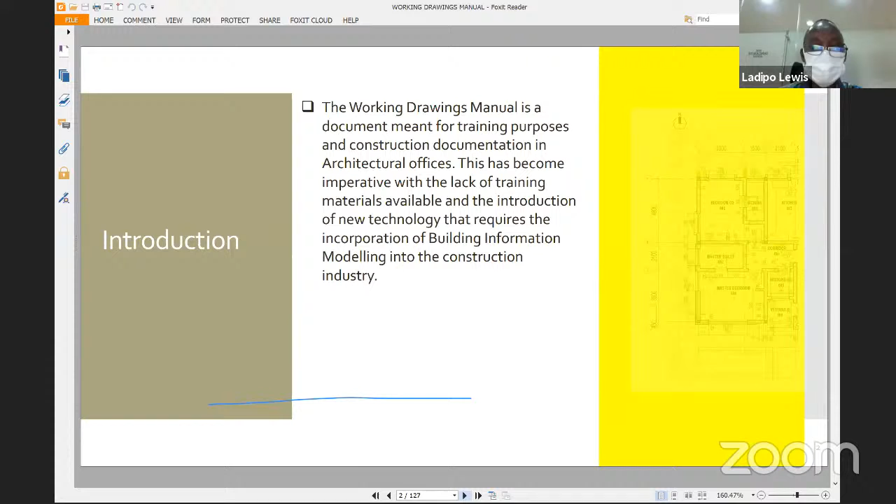Now let me go to the summary of what this manual is going to contain at the end of the day. You can see we've done the introduction, the types of drawings, schematic drawings, design drawings, detailed drawings, working drawings. I'll briefly go through that.

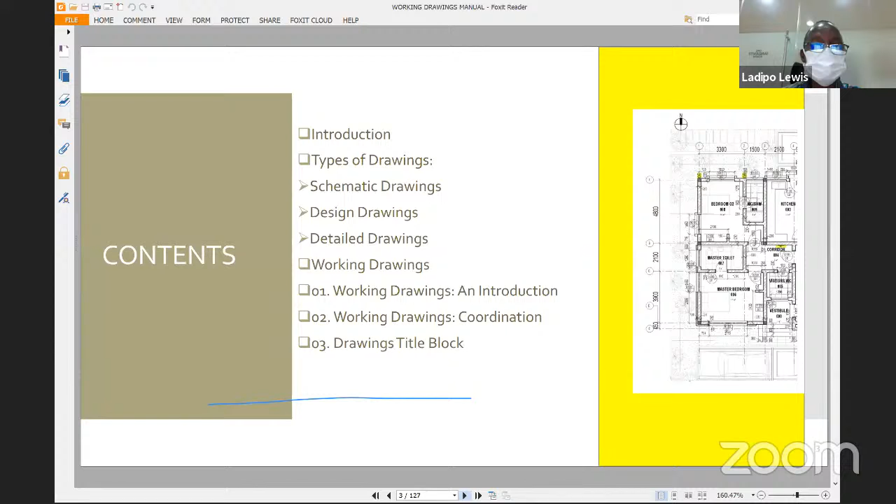We've gone through this before, but I'll briefly go into that. Then the coordination, requirement for coordination. Then we take the meat of the drawings: the title block, the schedule of drawings, then the key drawings, site plans, floor plan, reflected ceiling plan, roof plan, sections, elevations, and interior elevations.

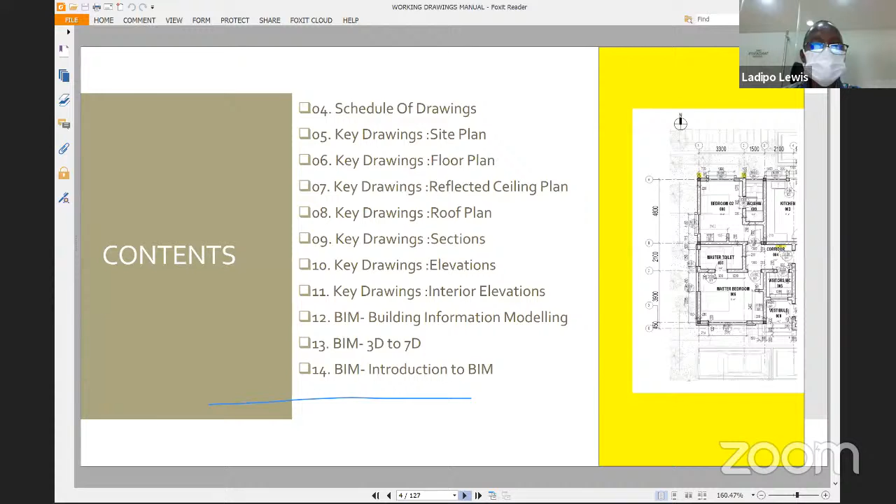Then we also want to go into BIM, building information model. What is it? Then evaluate BIM 3D to 7D. Then really the introduction to BIM itself, BIM computer modeling, BIM computer visualization, BIM external and internal collaboration, BIM construction coordination, BIM for calculation, BIM for sustainable design, BIM for parametric object technology, BIM for computer manufacturing, BIM for documentation. Then we'll go into a summary and our references.

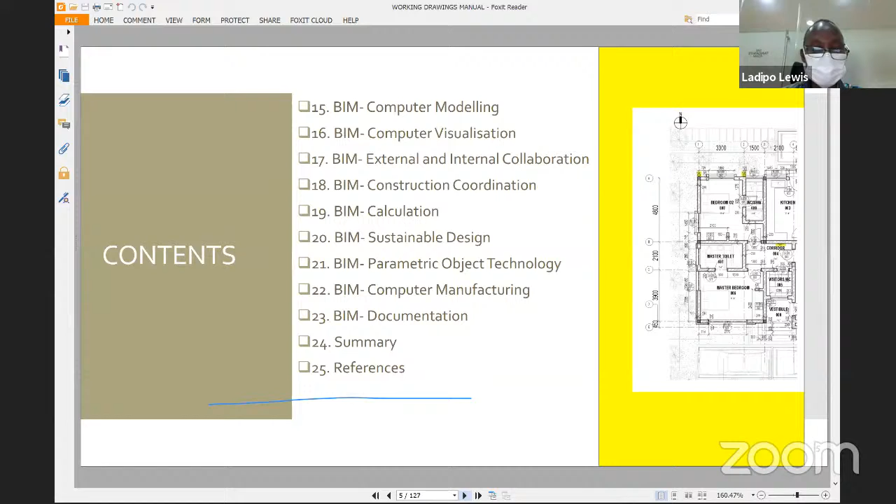So it's going to be quite an extensive document. It's a working document.

I'll briefly go through what we've covered in the last presentation. Drawings can be classified in the design development stage into three categories. Some would say design and detailed design can be merged into one, while others split it because there could be some variations.

So you have your schematic design, which could also have a subset called concept design, where you don't really have a building, but you have abstract sketches of what you want to do. Even within schematic design, you could have a concept subset, and then you have the design drawings, where you have an idea of what you want to do.

At that stage, you have overall dimensions and overall layout. You have those basic inputs, but you've not really started collaborating. So when you go to detailed design, you are collaborating with the other consultants—mechanical, electrical, plumbing, AC—bringing them in for a detailed design.

By the time you're going to your working drawings, as you'd say, you've brought in workshop drawings, details of every part of the building, and you're on site putting things together.

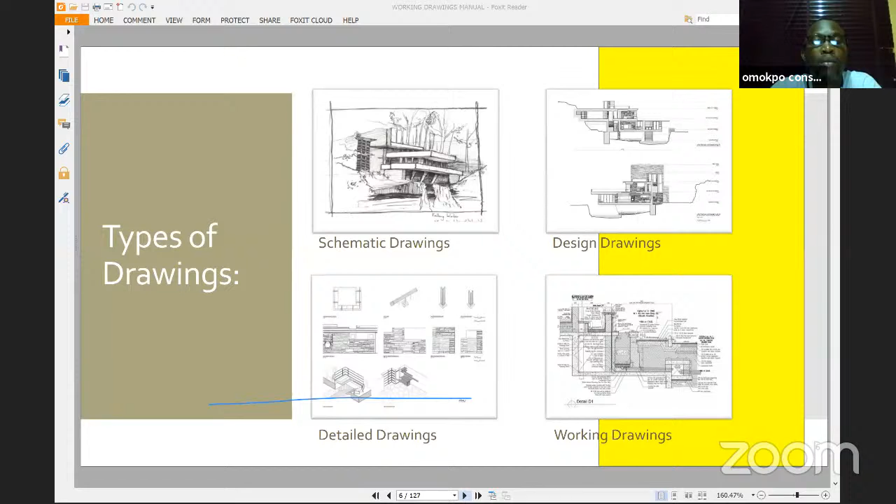And as you know, on site, you also will continue updating your drawings as new things come up, as issues on the construction site are dealt with, until you get to the end and you also have an as-built drawing. I can tell you there is hardly any project where drawings are not updated at the end of construction as as-built drawings.

Now, so you would have this presentation, as you have seen. I'm showing schematic drawings from bubble diagrams to some perspectives and some color drawings. So you can call these schematic drawings.

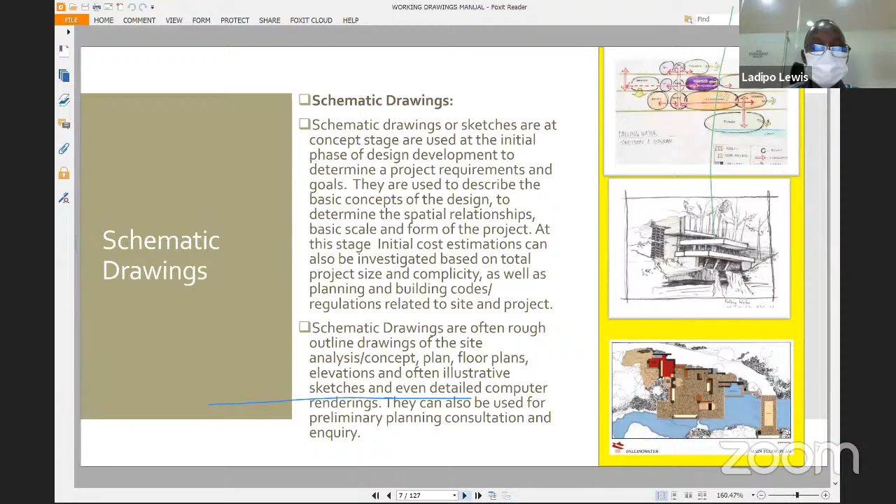Design drawings show a bit of outline and detail, and the architect has already brought out his proposal, which at this stage can even be sent for planning approval, or at least for preliminary assessment. So you have that as a design drawing.

You can get full client approval and say, look, at this stage we're moving into the real details of putting other things together. You have your structural members or the concept of the structural components at this stage.

Now, at this stage, if you decide to change your drawings, it means you are starting afresh all over again. So you need to be careful, because if you've gone through the proper process, you've actually done quite a lot of work.

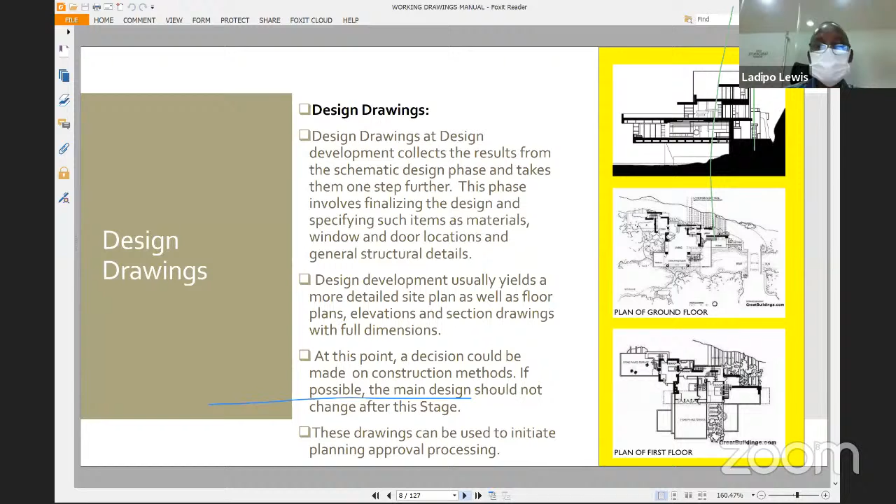Now, when you get to detailed drawings, you're already working with other consultants. A lot of drawings are coming in—some subcontractors like AC and acoustics will be sending you drawings and so on. You'll also be looking at a lot of specifications that will be finalized.

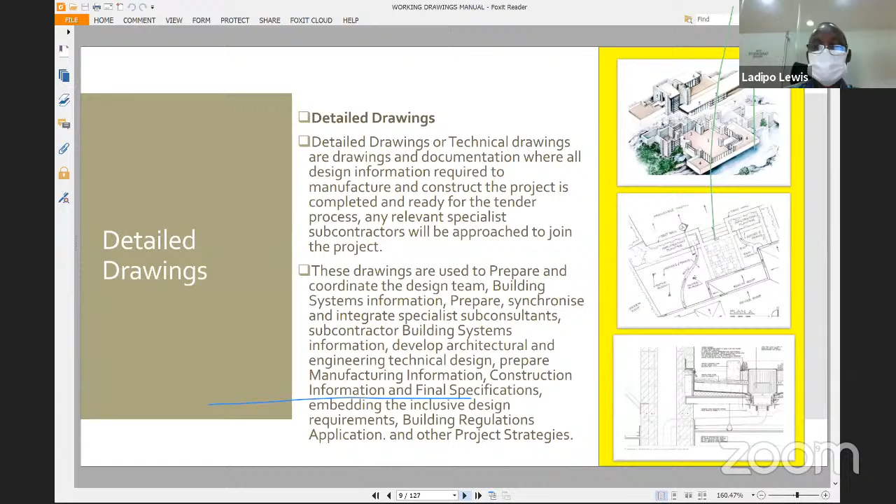And by the time you go into your working drawings, you are ready to build. So there are a lot of details there. You'll be thinking of waterproofing details, finishing details, specialist works that will be coming into the project. These are the drawings you use to build.

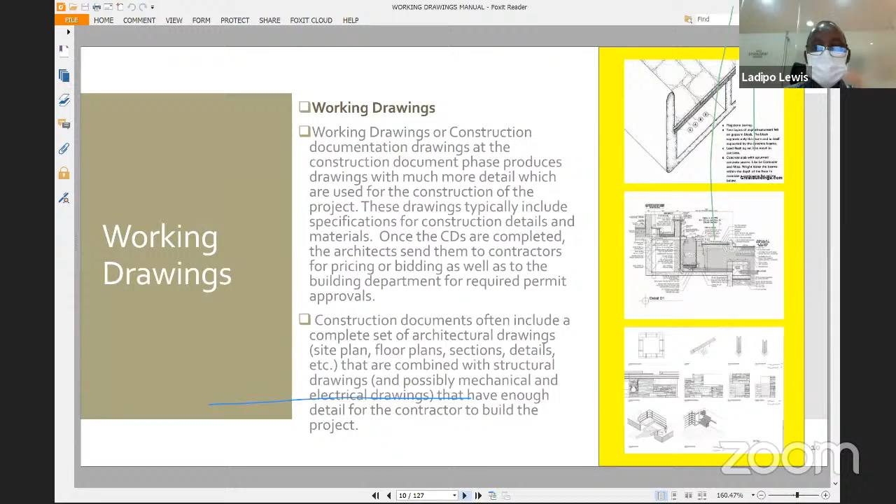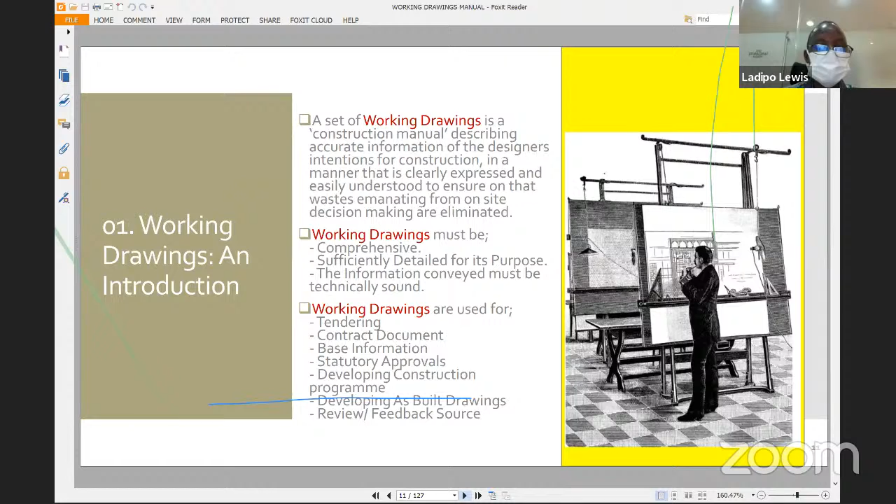So, as you can see, the set of working drawings is a construction manual, and it's supposed to be accurate. You're going to use them for tendering, contract documents, base information for statutory approvals, developing a construction program, and developing as-built drawings, as a review and feedback source for whatever you're doing. It must be comprehensive, sufficiently detailed, and technically sound.

Now, one part of working drawings is coordination. You need to understand that you cannot have a set of working drawings without a serious amount of coordination between what you started off in the schematic design, what you're putting together with physical planning requirements, and what you're putting together with mechanical, electrical, plumbing, and all other aspects. You need to coordinate at all levels.

You need to avoid discrepancies in what you will put on your notes or your title blocks.

The coordination aspect is key. One of the things we notice is that for coordination, you remember the days when you were drawing manually with tracing paper. You had to put the structural engineer's drawings on top of your architectural working drawings, and of course they must be on the same scale, so you could overlay the structural members with your architecture. You see that columns are in the right position, concrete shear walls are in the right position, and they don't obstruct the architectural design.

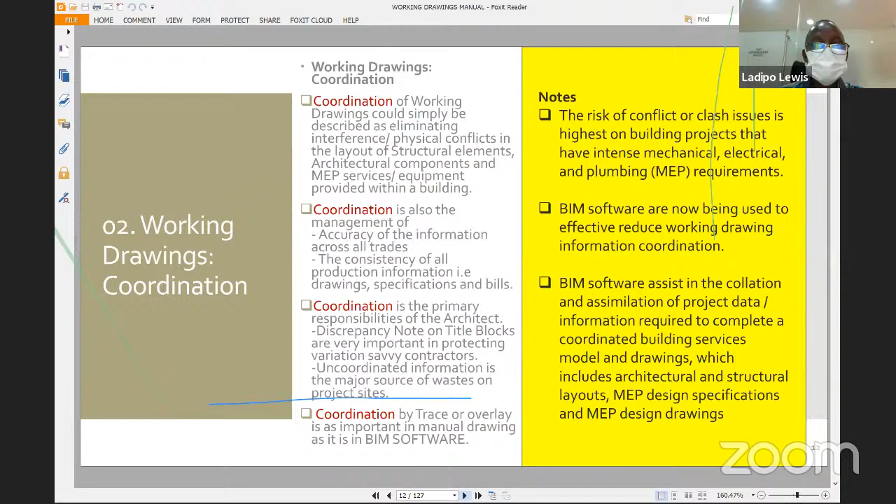This also occurs even in computer-aided design softwares. ArchiCAD has the trace tool that you can place one sheet on top of another and overlay it. Even if it's a 2D drawing, you can still overlay it. Revit too has that capacity as well. So coordination becomes a key thing. You need to have a checklist of whatever you're coordinating together in your working drawings. It's very, very important. Those mistakes cost a huge amount of money on construction sites.

So we'll go to the first part, which I'm going to run through since we've been doing. That's your drawing title block. Please make sure that they are accurately laid out. Make sure that you check them. You should have the architect's name, address, and details. You must have the client's name on the drawing.

You should also have the project name and address. This should be part of the details in your presentation of the title block. It's key. It's a requirement for planning approval from the stage of your design drawings.

You should have your drawing title. We've had a series of drawings coming up by candidates or architects who have a project for a commercial building, and then you're seeing the title reading residential. So this needs to be carefully checked at all stages of your production of working drawings.

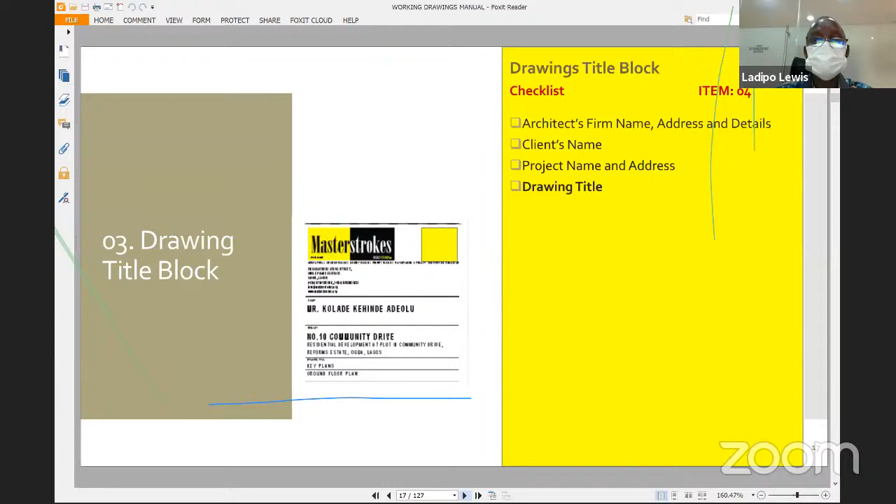Project number - you should have a project number so you can track your projects. The project status: is it a schematic drawing? Is it a construction drawing? Is it as built? Is it a measured drawing? So you should know the status, or is it for planning approval? You should know the status of those drawings.

Then the project team details - who designed it, who checked it, and if you want, you might have a final reviewer, so you can track who did what.

You have the scale of the drawing. It's important that you have a scale so that people can reference your drawing and relate to it. It's important, even though it's recommended that contractors don't measure, but at times you need to be able to understand how things fit on the drawing.

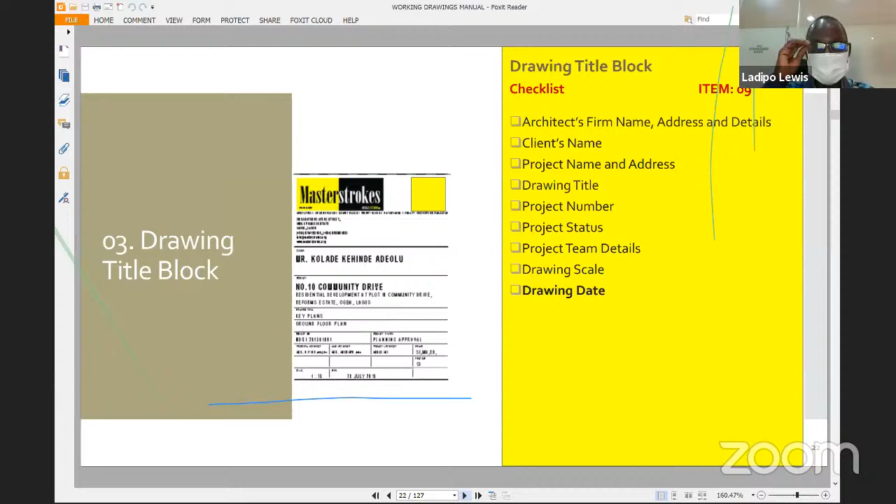You have a drawing date, very, very important. You should know where reviews were made, which drawing came before another, so you don't issue out an old drawing and then there's a bit of a calamity on site, discovering that a lot of work was done, but the wrong drawing was issued. Then the sheet size, so that those printing your drawings will be able to relate to it.

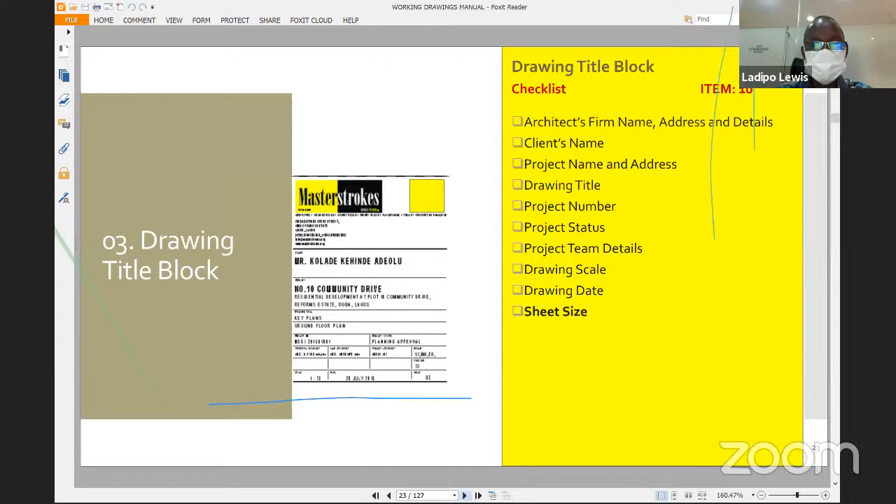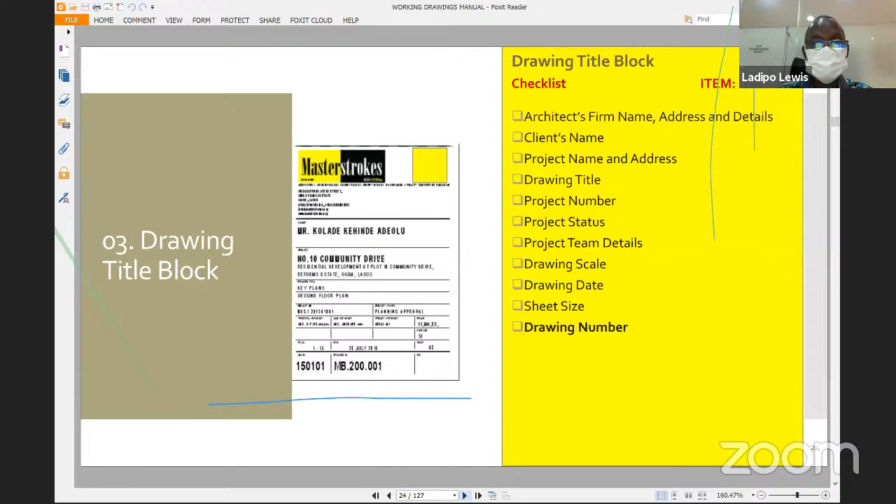Now the drawing number - if you have 100 sheets, 200 sheets, and there was an error, somebody spilled them on the floor, how do I arrange them? Drawing numbers are quite important on each sheet, so you can put them back together. Then a revision bar - this will address the revisions that you've made, one after the other.

Drawing notes, which you can update on all the work you've done on the drawings. Here you can put quite a lot of details to address anything that you want the person going through your drawings to note.

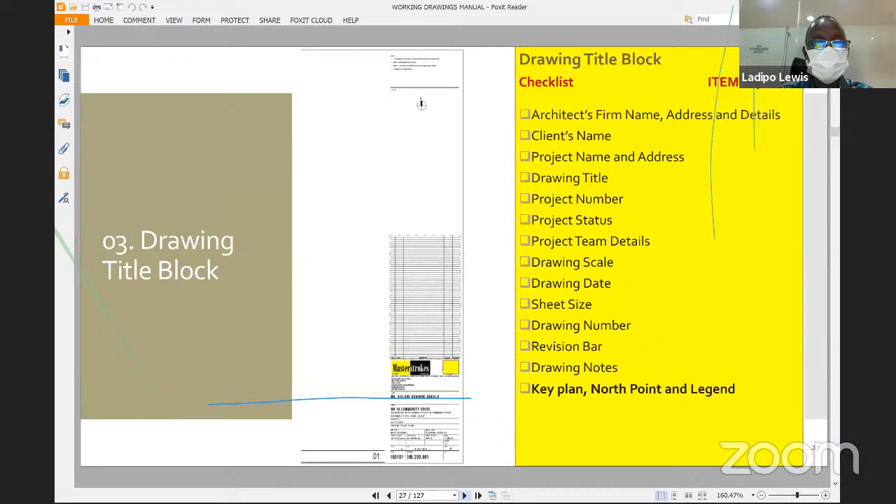And then your key plan and the legend. If you have a lot of details, the legend is the best way to note them down on your drawings. Now you have the schedule of drawings, which is basically a list of all your drawings.

So you have your location and key drawings. The more detailed a project becomes, the more drawings you might need to have on your schedule. And you can create subsets and subsets of these drawings as you go along.

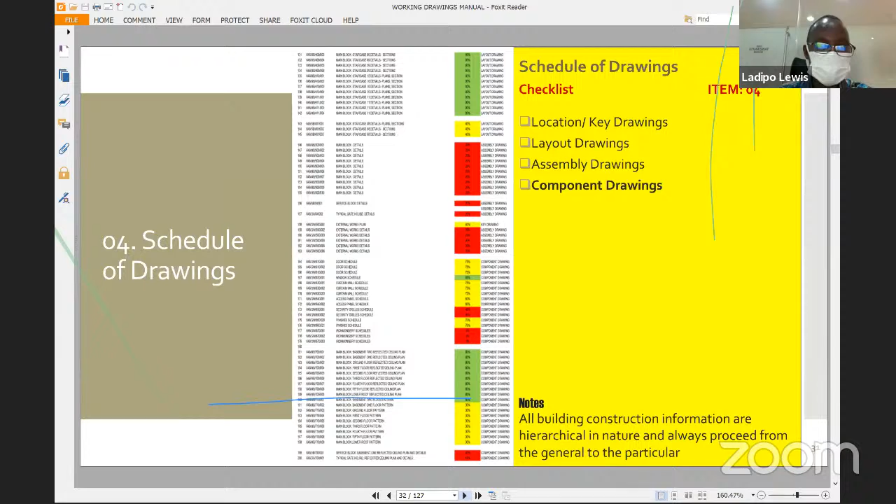You have your layout drawings, which we've gone through already - your plans, elevations, and all those drawings come in. And then assembly drawings, details that will relate to different parts of the drawings that become the whole when you put your drawings together - here you have some callouts and some blown up details. Then you have components - door schedules and things like that that you put together for your project. So let's go to the key drawings, the site plan.

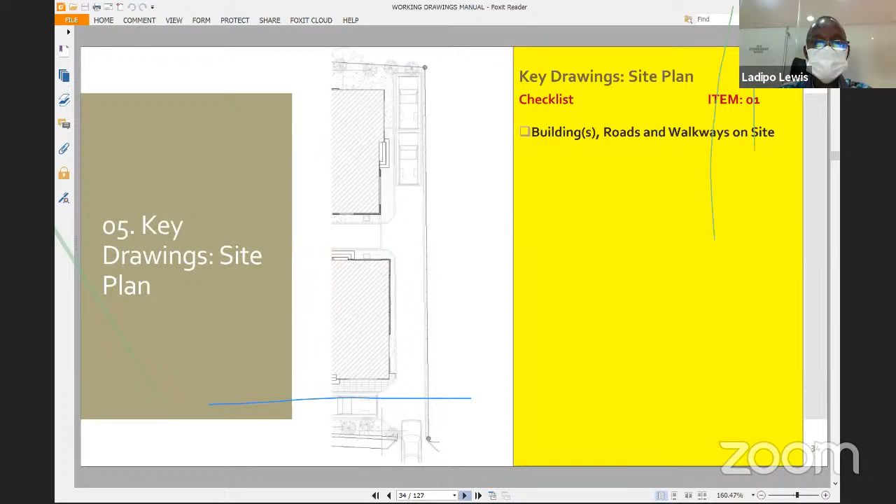On your site plan, you have your building, which is the majority of drawings on the site plan. Then people forget the roads and walkways on site. You have your north direction, which is going to repeat itself on every drawing. It should be shown.

Then grid lines. You put these on your site plan, and they form a part of all your drawings. Probably only your schedules will not have grid lines. These grid lines help you track elements of your drawings from one sheet to another. You continually see them on practically every drawing you're producing, and you should put them there.

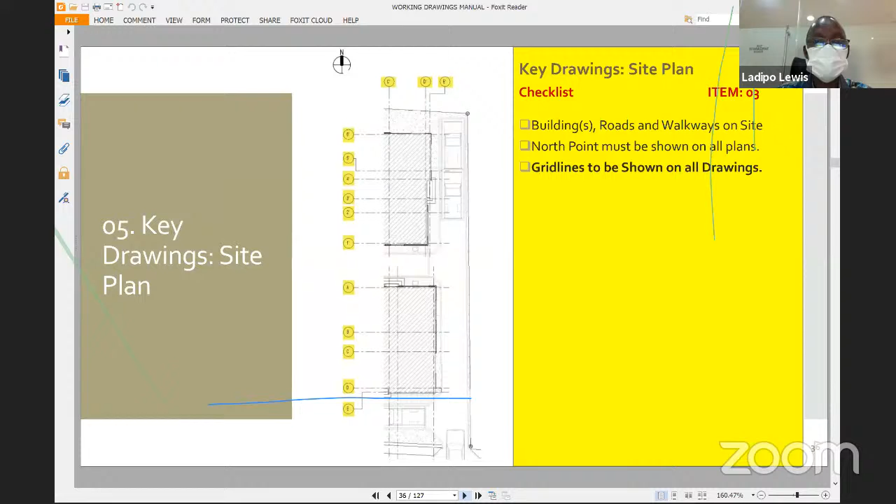Then you have the dimensions. This is key, there is no use having a grid line without having dimensions. Then you have the boundary lengths, bearings, and annotations. Always remember those are key things you should have in your drawings.

Annotations help people identify elements in your design and know the difference between one object and another. Then you should have your bearings. You could even have them in degrees, laid out to show what angle they are to other objects, or angles to maybe your building or structures on site.

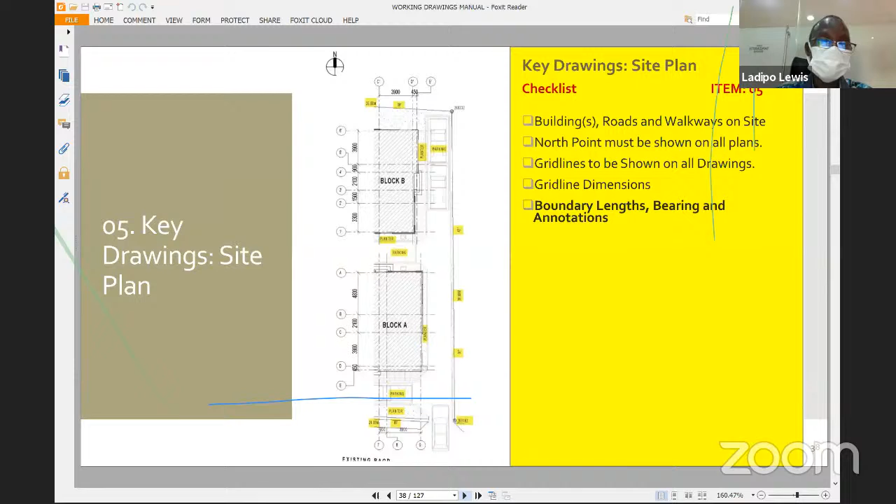Then you have graded and ungraded site levels. This is also key for you to note in your drawings. It's no use having a site plan with no levels, but that's one of the major things you're going to put in place when constructing the building. What's the difference between the level of the road and the site? What determines that? It's your drawings.

And when errors like this are made, you notice some sites where there's a lot of flooding because levels were not transferred correctly. And if you have contours, you need to show what the existing contours are and where you have amended them.

Then your site services and external works. If you have sewage treatment plants, soakaway septic tanks, manholes, they need to be indicated. Any external services, and this can be very, very detailed work, which will include the fence, external lighting, your kerbs, your paving, which areas are grassed, all external works.

You're having electrical works coming in, anything you put on the ground, tanks, diesel tanks, numerous elements of external works to be on that sheet. And you would have all these sheets I'm indicating separated, so that your details show clearly.

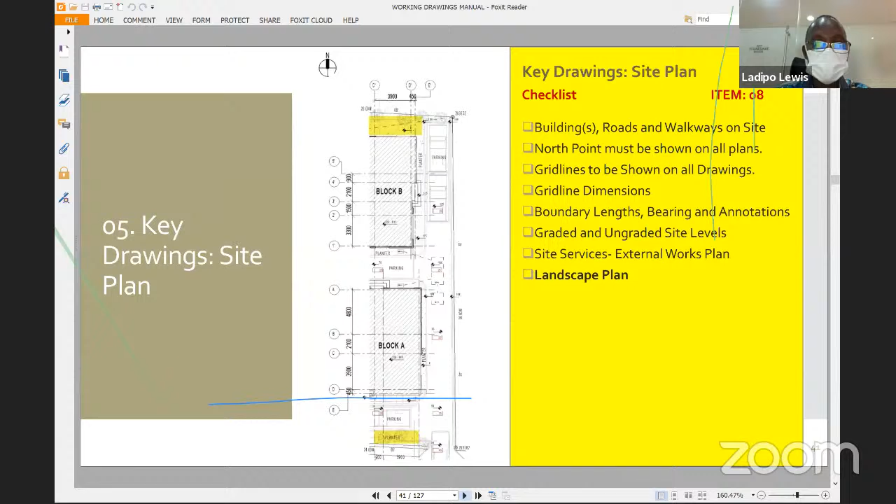Next will be your set out points, dimensions for your setting out plan. You might need to do the triangulation of your building as it relates to your building perimeter, and these are always tied to your beacon numbers on site at the corners of your site. This is very, very important. We've seen site plans that really don't have triangulated dimensions for setting out the building.

Next is specifications and keynotes. Here you would list items that you would like to describe. There could be specifications for the kind of paving stones.

Are you expecting heavy vehicles on site, so the paving stones are not going to be the normal?

You could be doing specification notes for the kind of fence. Is it concrete? Is it block work? Is it brickwork? What's the finishing?

So there could be specifications for your manholes. Are they concrete? Are they composites that are pre-made already, pre-manufactured?

Do you have external taps that you want to specify? External electrical socket, weatherproof electrical sockets. So these specification notes would indicate those specific elements.

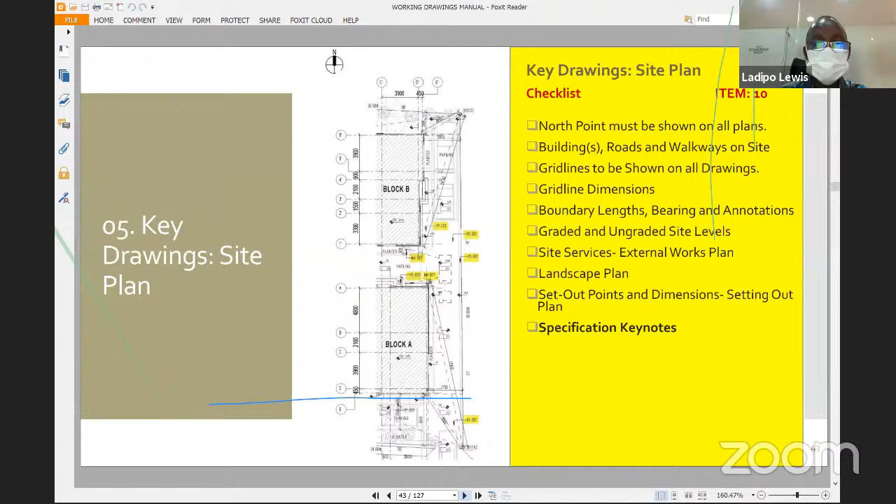Then you have callouts. Do you need to blow up something? Yes, you have some element in your landscape plan that you need to call out, and at the scale at which the site plan is, you need to expand on it. So that becomes necessary to show which areas you're calling out.

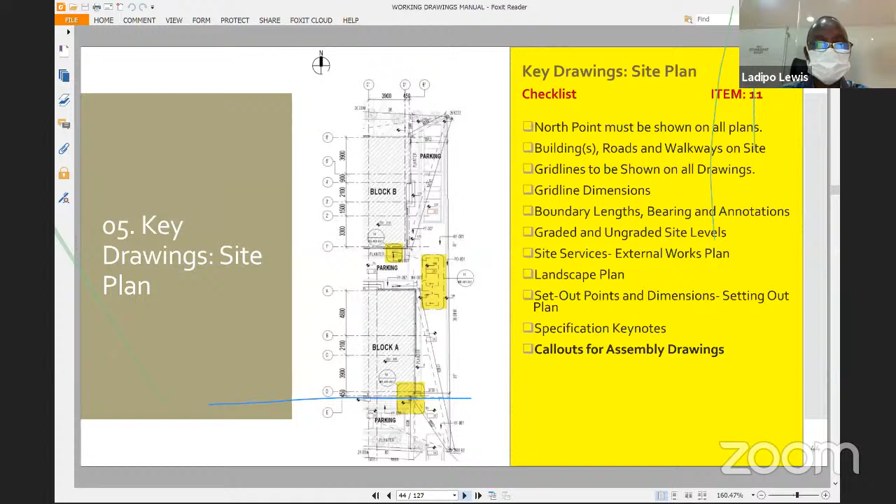And then you have a legend. You could have a series of items in your site plan that you really cannot describe in writing. So you have a legend to it, where you have a number indicating that, and you have a legend where you describe what those elements are.

So your steps, external steps, you might want to describe them. You might want to describe the kind of actual grass you have there, so you can have a series of details in the legend as to what kind of grass, what kind of trees could be numbered. Rather than you trying to write the full botanical name of the trees, you put that botanical name in your legend.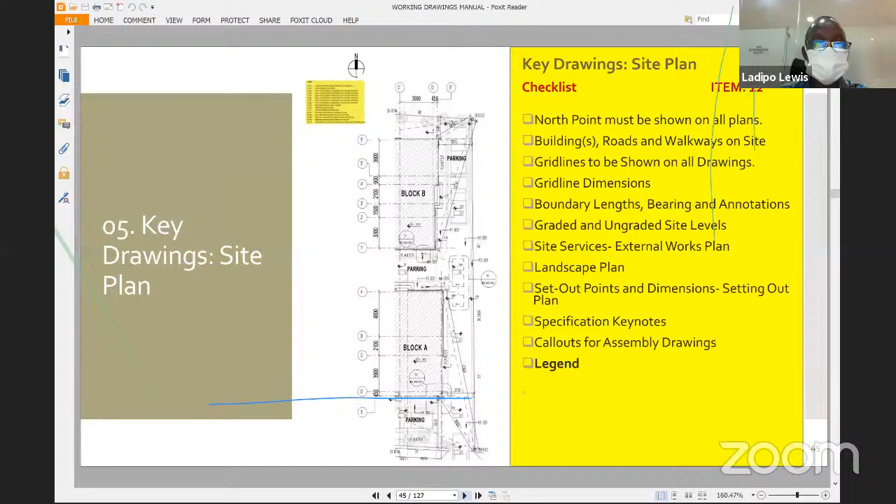Then you have the statutory development data. Of course, everybody seems to put that in because it's a requirement for planning approval, where you may have your square meter of the site, built up area, percentage of landscape area, volume of the building, building height, in some cases, lettable area.

You have your number of parking. You could even do a calculation for parking ratio.

So some complex buildings have a full page for this statutory development data, because you might have to do a lot of analysis. It might be a complex of buildings where you might want to have a series of data relating to your building code analysis, the analysis of the building as per exits, as per fire, as per escape routes, muster points, and things like how you've calculated them and the area set out. So statutory development data could be quite intense on some types of projects.

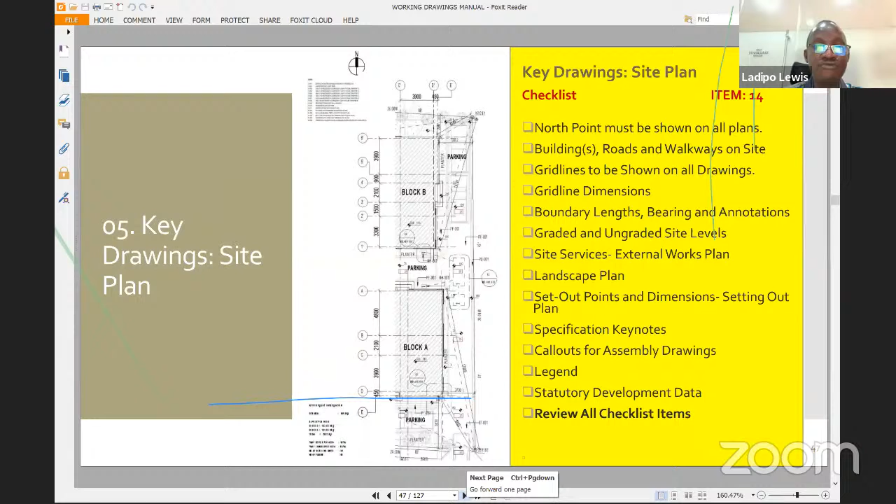Then you now finally review all your checklist items. It's a good thing to have this as someone checked it and someone checked it again a second time. It might be laborious, but it helps before drawings go out and you get embarrassed by what you sent out with so many errors in it, which if you had been reviewed, you would have corrected.

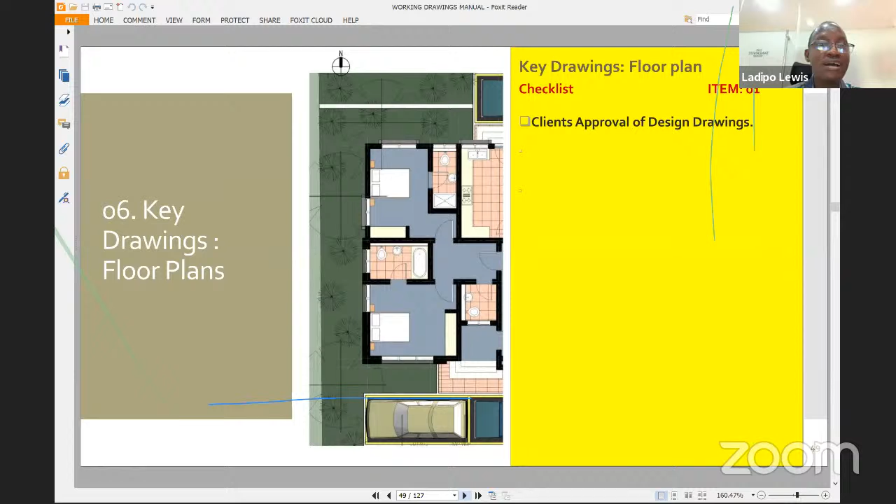So we now go to key drawings, our floor plans. Now, first is, before you start going through those details of doing that, get your client's approval of your design drawings. It's important before you move those drawings into working drawing stage.

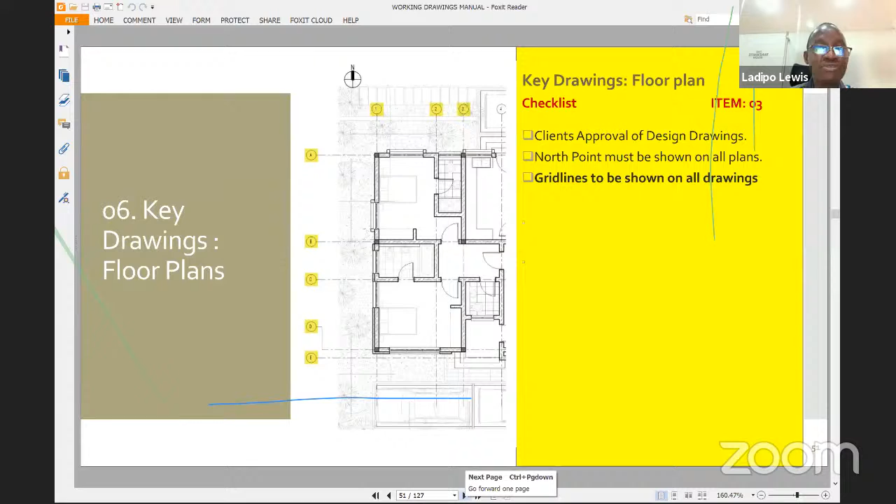So your north point will show up again on your plans. Your grid lines from your site plan, you transfer them back again to your floor plans. It's a good idea to have this so that this could also help you understand how your floor plans relate to your boundary lines and your setbacks. And it helps coordinate work from the setting out plan to the floor plan when they all relate together.

Then you have dimensions. Clear dimensions are required. There's a problem I see when people use BIM softwares with automatic dimensioning, and you start to see unrealistic dimensioning numbers arriving at, instead of 3300, you have 33999. These numbers you need to avoid because they can't be measured on site. So it's a problem we didn't notice when we were doing drawings manually.

Of course, the limitations of dimensioning would actually force you to be rigid about having them at precise numbers, rounded numbers. But unrounded numbers can be very confusing and can cause alignment errors in the building. You probably will not notice them visually, but when it comes to laying of tiles, they start becoming obvious. So work towards rounding your numbers, so that they are figures that can be set out on site easily.

And center to center dimensions, I always tell people, are the principal things when dimensioning buildings.

It's the easiest way for the contractor to set out your building accurately. And whatever you want to fix can be dimensioned to those center lines.

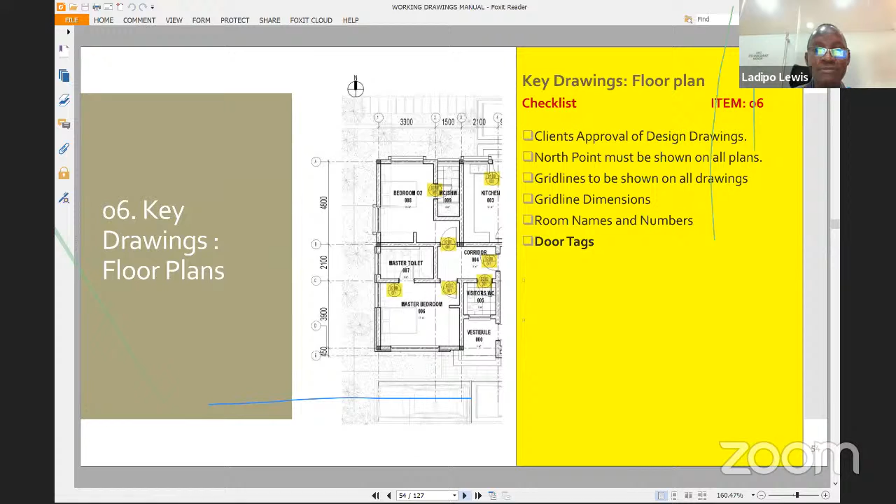Then you have your window or curtain wall tags. Just like you have your doors, you also have tags for your windows, and if you have curtain walls or anything like that, you can have tags to them. One thing I'll also tell people is that if you have cladding too, you can have tags to cladding on certain walls. If you have special finishes, you could also detail that as well, so they show where they are on the floor plan.

Then you have your fitted furniture tags and fixture tags. You should be able to identify wardrobes, plumbing fittings, and things like that. So fixture tags are important. One wardrobe dimension may be different from another, and even the number of wardrobes in the building. You could have detailed fixture tags for even the kitchen cabinets. This is always left as an afterthought in design, and of course can also be a cost-consuming issue when not thought through.

Then floor levels, very, very important. They help save a lot of cost on site because the contractor can identify the differences in levels, and you don't just use a line across a threshold as the direction, but you have those levels, and you can relate them to your external spaces and from one internal area to another. If you have a building on a site that has differences in levels, it becomes more important. In split level designs, floor levels are the only way to identify the difference between one space and another on the floor plan.

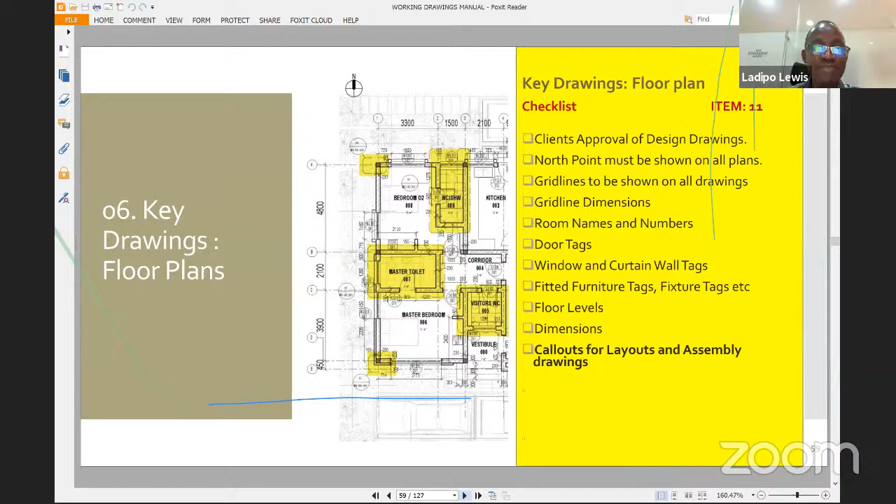Now, relevant services locations. You could have ducts, you could have rainwater pipes, you need to indicate those. You could have gas pipelines, where will they go through? You could run pipes for air conditioning, and you should indicate where those would pass through your building.

Then, of course, your section lines. As your section lines start off, they are going to be relating to every part of your key drawings. They should be the same from one drawing to the other in the same place, because your sections come to your floor plans. You could also relate to locations in even your elevations, so that your drawings could be related together.

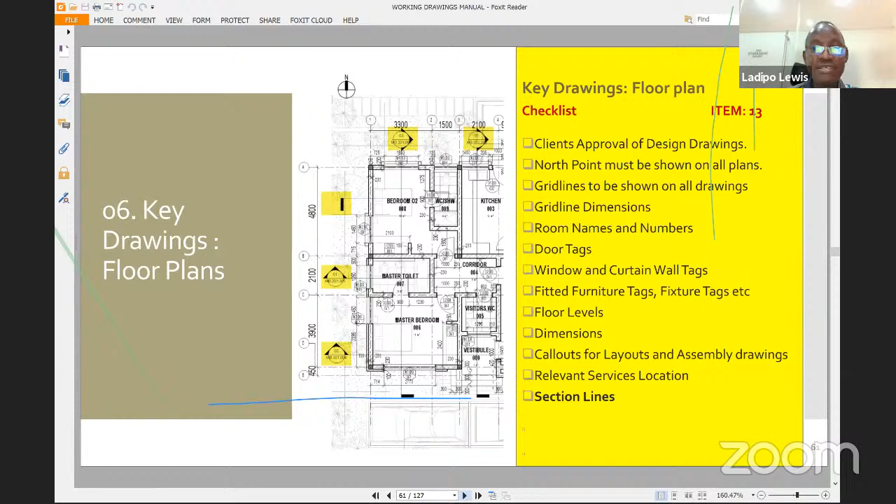Then you finally review everything on your floor plans. It's good that you have someone who does the work and another person who reviews it to check that person's work. That way, errors are avoided.

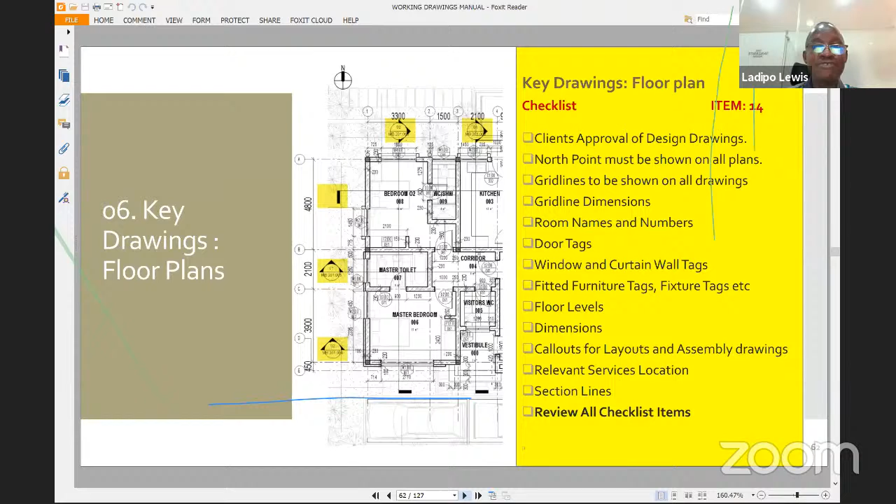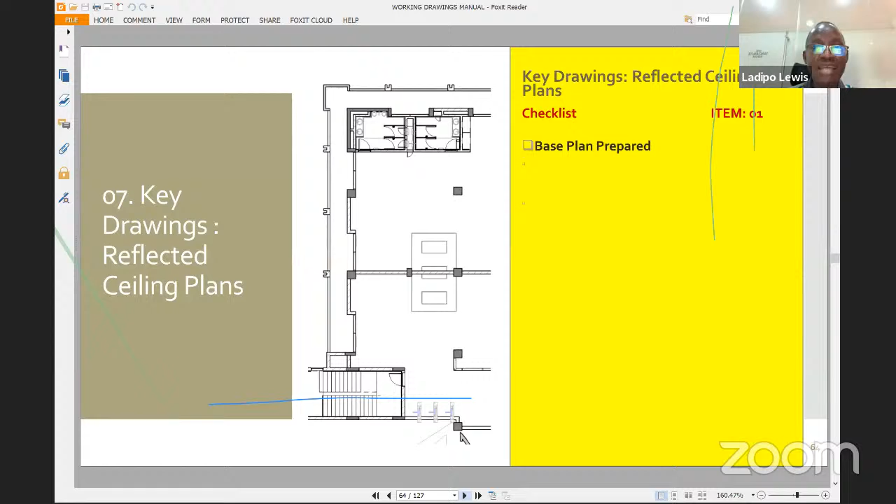So the next is your reflected ceiling plan. It's not something commonly done when you see a lot of working drawings. A lot of people think it's just required for suspended ceilings and office buildings. But in this day and age, where you want your artisans to be accurate, especially subcontractors putting in plaster of Paris ceilings, gypsum ceilings, spotlights, and LED lights, a reflected ceiling plan would help, and it shouldn't be an afterthought on site. So you would start with the base plan that you prepared, and then with the same north direction.

Orientation is in the same direction, and then you have your grid lines that you transfer from your floor plans down to the ceiling, reflected ceiling plan. Then you dimension those grid lines as well. Please check that those dimensions rhyme.

Now here you might have some off dimensions, things that because of the ceiling plan. Try and round them up, they help on site, because a lot of times the contractors will approximate them, and it might leave some things in the wrong position at times. So put the grid line dimensions there.

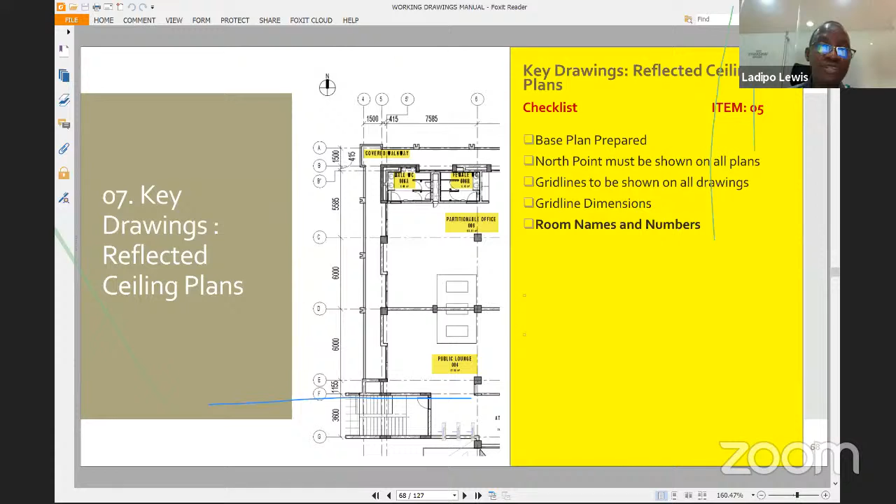Then the room names, they are required. Even though it's a ceiling plan, you should know what is below that, what's going to be below that ceiling. It might help whoever is laying out the ceiling to understand, oh, this was a bathroom, I don't need to do this there, or something else should be put there. There are some ceilings that work well for areas that are external, work well for areas that are internal, if you know the differences.

Ceiling grids and the ceiling itself, what is the size of the ceiling panel, and how would you fit them, and would you be having different types of ceilings? So if you have grids, you might want to have a ceiling that does not have a grid at the perimeter of the wall. You could have bulkheads. So having those grids and looking at and placing them will be important. Sizing them, scaling them will be important.

If you have wood paneling, you show it. If you have tongue and groove wood strips, you should show them and how they fit at corners.

Next, ceiling fixtures. These are your lights. You have a ceiling fan. You have air conditioning outlets. You need to indicate where you want them fixed. This could also extend to quite a lot of other fixtures, things like firefighting, your smoke detectors, your sprinkler systems.

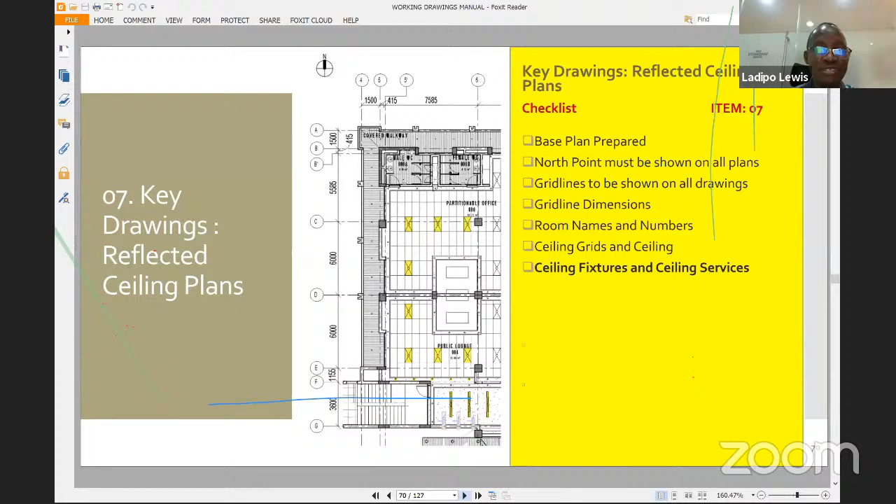Then you have your levels. The ceiling levels also matter, what comes at this level and what comes at the other level. And if you have suspended ceilings that are changing levels from one area to the other, you need to indicate those levels. You could have an area, like a smaller space where you want the ceiling dropped so that it's not uncomfortable and doesn't look like a tunnel.

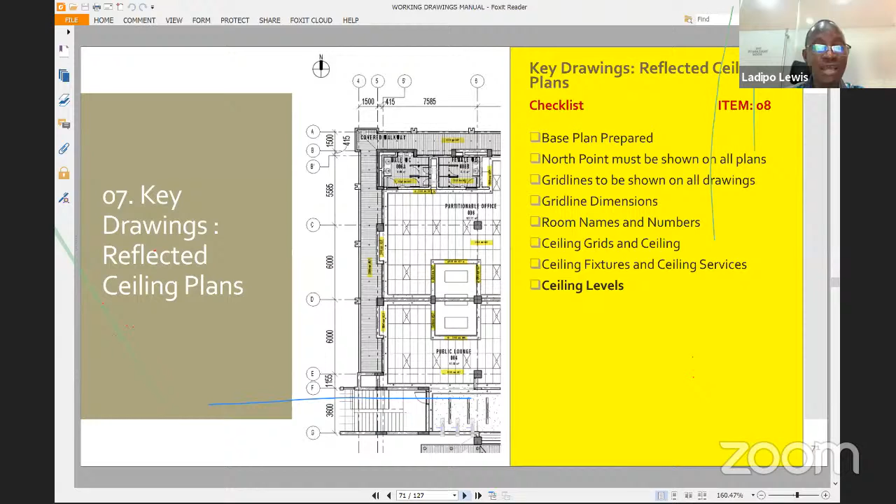If you don't put those levels there, they'll probably use the same level for the entire building. So that helps, and you don't have to physically start to change those on site at an additional cost to the client.

Then you're setting out dimensions and tiling directions. You should be able to indicate which direction you want the layout to be and how you want it tiled, and you dimension the spaces in between them. This helps get a uniform layout.

Relating to how the ceilings are going to be fixed, notes relating to various items, minute items that you need to describe. So you might attach numbers to them and then you describe them. You might describe the finishing, the color, the thickness, some characteristics, should be specifically fireproof, to what extent.

As you know, ceilings are called horizontal assemblies. So you might be specifying that you must have some rock wool above it, you might have some fire damping materials above it. So all that you would put in your specification keynotes.

Then your call out for your layout and assembly drawings. On the ceiling plan, you have your call outs for various rooms, like the bathrooms or toilets. You could have specific call outs for those spaces because you have some special type of ceiling work and fixtures there, so you need to actually enlarge them and show what they are. Even around columns, it becomes a problem around circular columns, how do you want that detailed?

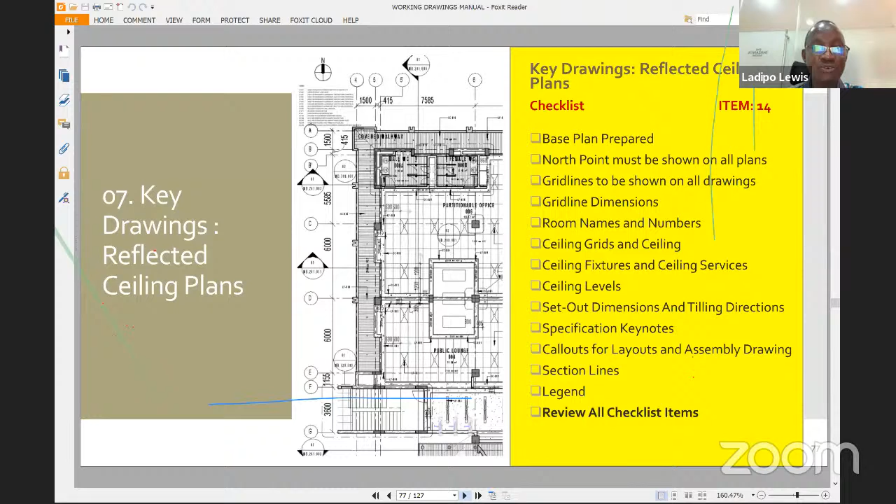So we go to the key drawings, the roof plan. A lot of roof plans are done with just simply the outline. Yes, you start with that, but a lot of elements will need to go into it. Of course, again, the north direction, so we have an orientation for your drawing.

Then your grid lines, again, you need to bring them up all the way from the ground floor plan to every other drawing up to the roof plan. This helps the contractor understand how you place your roof on your building, and even you yourself who design it. You can see the offsets, you can see the soffits that you're going to need to provide.

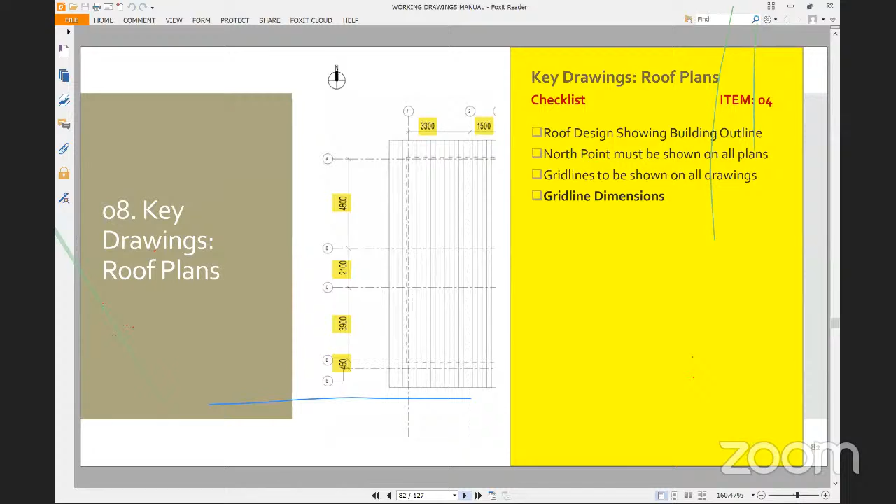Then you have the grid line dimensions required as well, so we can understand the roof layout better. Then you have your rainwater pipes, roof gutters, if you have a gable roof or a lean-to roof with roofing sheets. Even if you have a concrete roof, you should have spouts.

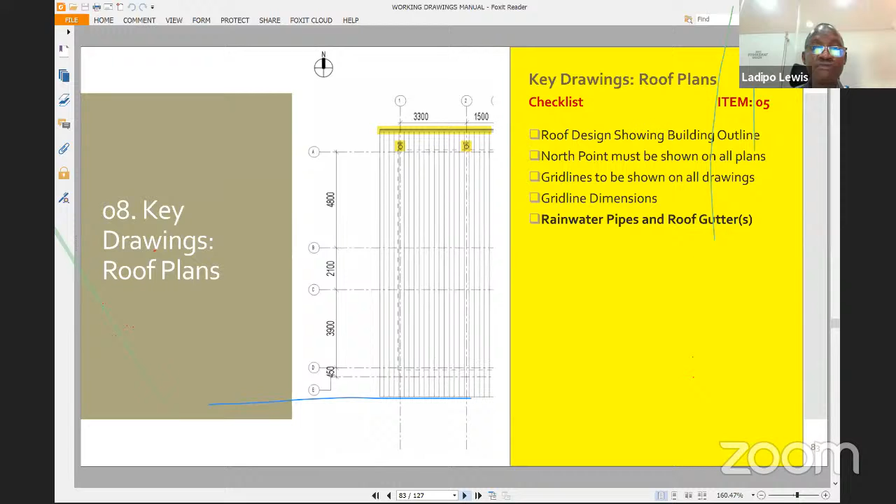You could have rainwater pipes, you could have scupper drains. Quite a lot of elements will be in your roof plan. You could have details of what kind of floor drains are required. Then you have the roof structure arrangement.

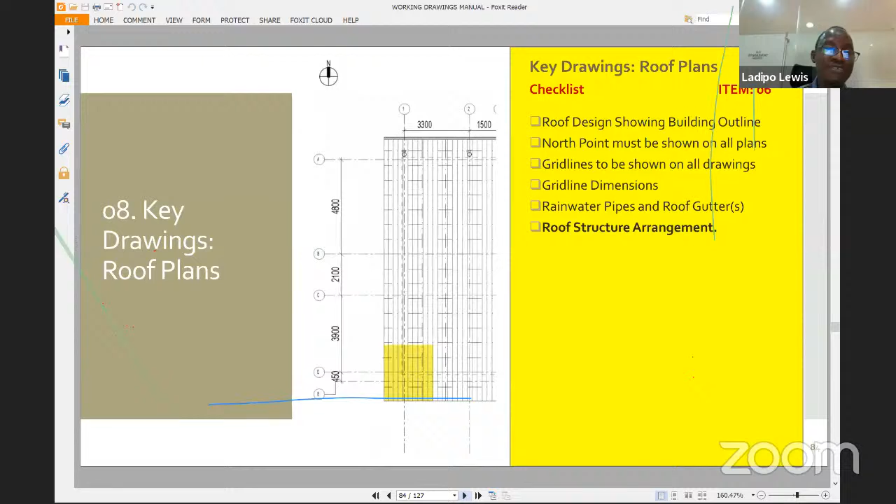In the normal roof carcass arrangement, you show your purlins, a section where you can cut out to show your purlins, your roof trusses, and show what direction they are laid out. In a concrete roof, you probably show the layers of waterproofing, insulation, screed, final floor finish you're going to have on them. So these are indicators that will come on the roof plan, and you could specify what they are. In some cases, you could have a slight overlap of those items on your roof plan to show the structure.

Then your levels, the roof levels. This with CAD now makes it very easy for you to identify the roof level, especially when levels are not equidistant from one part of the building to the other. It will be nice for you to show those levels, and those levels will transfer to all the other drawings, and that can give you a lot of accuracy in your building, in your drawings, and in your building at the end of the day.

Then your set out, you should be able to know how far from the grid line your overhang is, and that would help the contractor understand how to lay out your roof and how those elements affect even buildings that are adjacent to your structure.

Then your specification keynotes. Here you will be describing various elements, and you note them, and as you know, those specification keynotes you carry out to your legend as well.

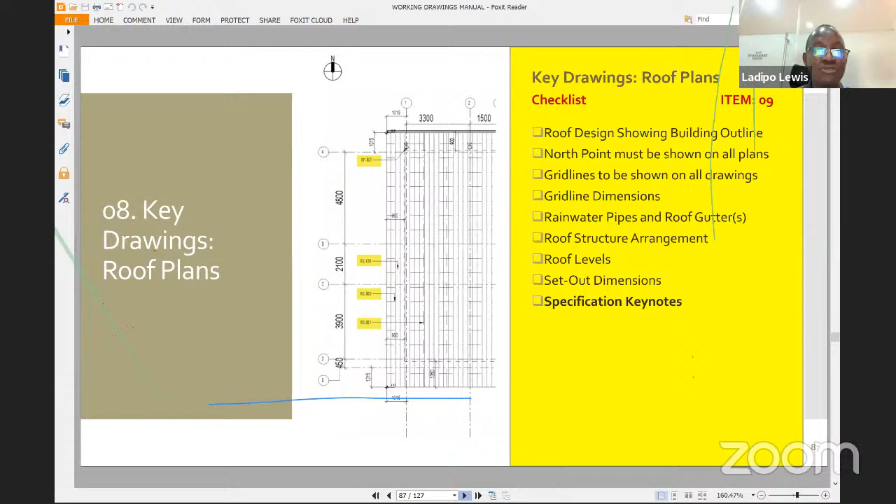Then you have your slope direction. You need to indicate that, so that there is no confusion as to what direction water is going to flow on your roof. Even in a concrete roof, you're going to have that done too as well, to lay out your roof finish into specific drains.

And there are quite a lot of drain types for roofs. There's a chain link drain, there are scupper drains, there are overflow spouts, there are floor drains of different types. You know the brand name Fubora, but that's just a brand name, but it would also be indicated in your roof plan.

Then you have callouts. You need callouts from various areas, callouts on the plan, in the plan, callouts that you can take down to sections of what that detail really looks like on your roof plan.

Then you have your section lines. This also will be on your roof plan. So as you see, you can relate sections to every part of your key drawings in plans.

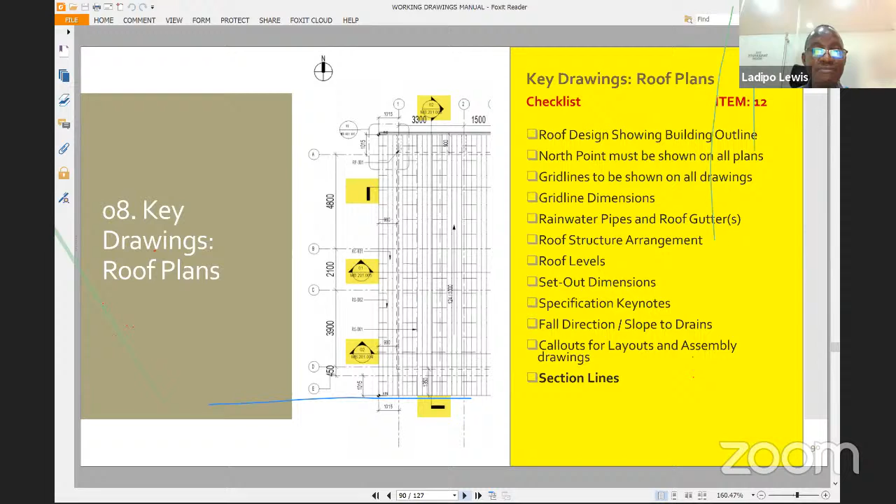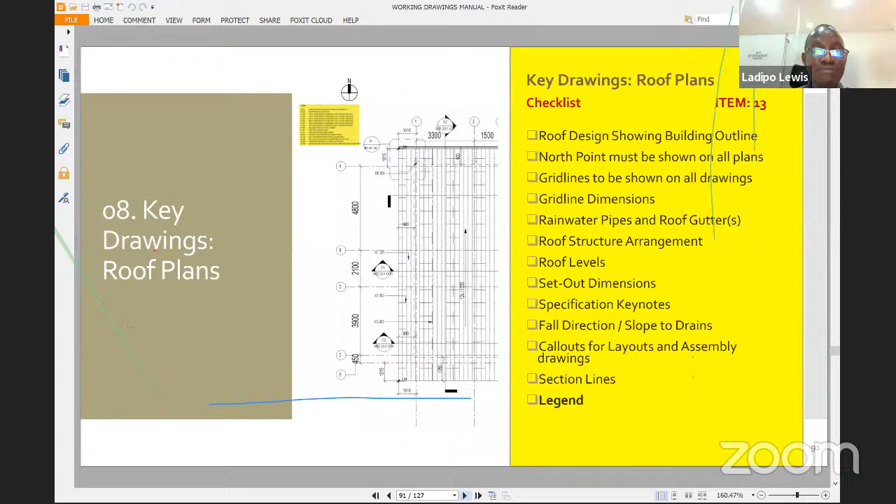And then your legend. Everything that you've noted out from your specs, you take it to your specification. Once you've written your specifications, you put it in your legend. All the things you put in your keynotes, your specification keynotes, you carry them over to your legend, and you have a legend table. So this legend table would make it easy to identify various elements in your roof plan.

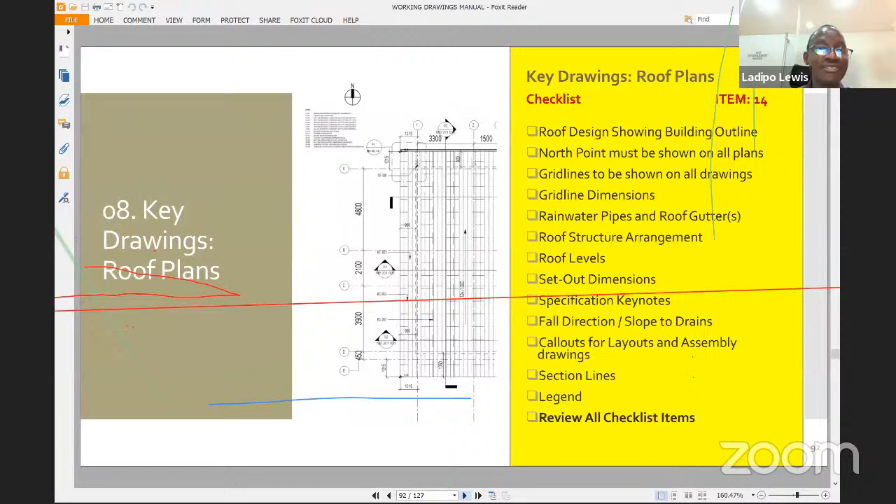Then you review again, and all your checklist items that have been put in your drawings, you make sure that everything is accurate, and your text, even spelling is important. When we start seeing spelling errors, it looks funny on drawings. It shows a little bit of carelessness.

Then you go to the key drawings sections stage. Here you have the outline of your section.

I also want to indicate that a lot of people believe that BIM software gives you accurate, neat sections. No, you still have to edit them and detail them and look at the construction details in those sections. So when you have your outline, you need to look at it critically, look at the junctions, look at the

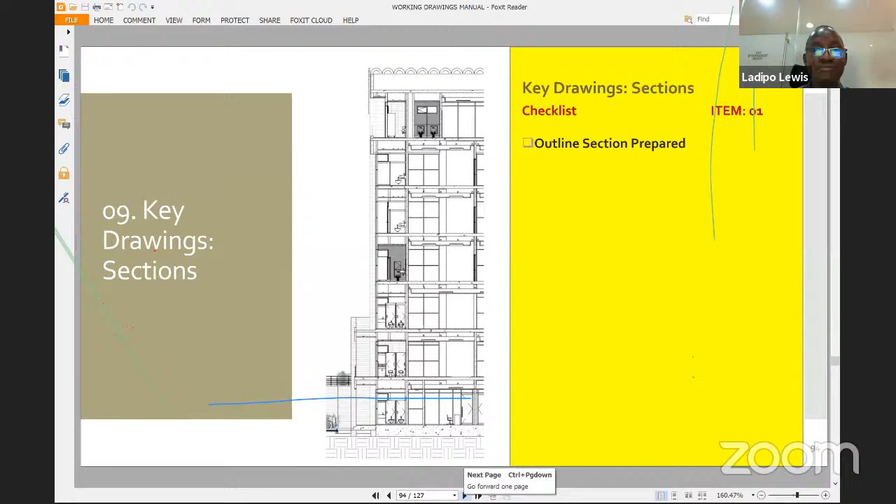connections, and make sure they're accurate. So you also transfer your grid lines to your sections. You put your floor datums, that means your floor levels. So like your floor levels on your floor plan, your roof, your ceiling plan, your roof plan can be transferred to your sections. So that will help you coordinate this.

Then you have your ungraded site level. You've done your design, you've changed the levels, you've changed that. You should show in dashes where those ungraded site levels are. This also helps your measurement of quantities to know how much excavation you might require on your site.

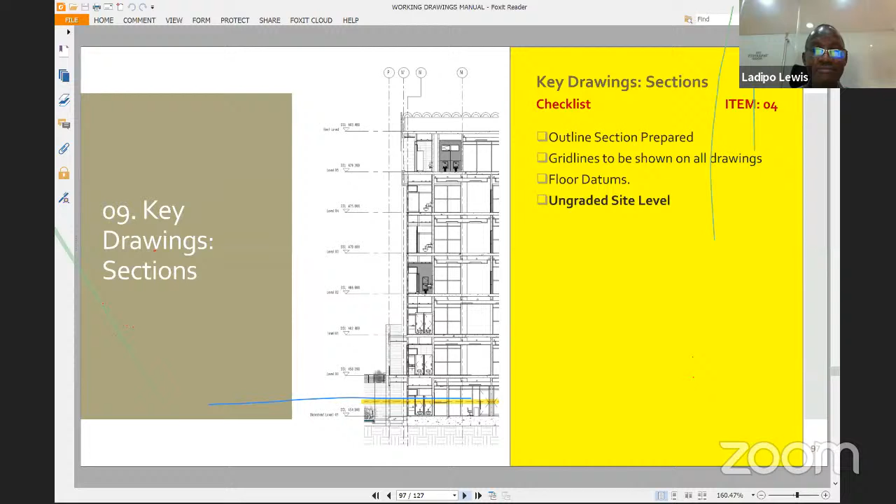Your room names and numbers also from your floor plans will now show up on your sections too. This helps relating the various floor plans to the sections.

Your door tags as well. So in your sections, we can identify doors from one area together. Doors in the toilet, doors in the bedrooms, doors in other spaces.

Then we have your window and curtain wall tags as well. This also will show up in your sections.

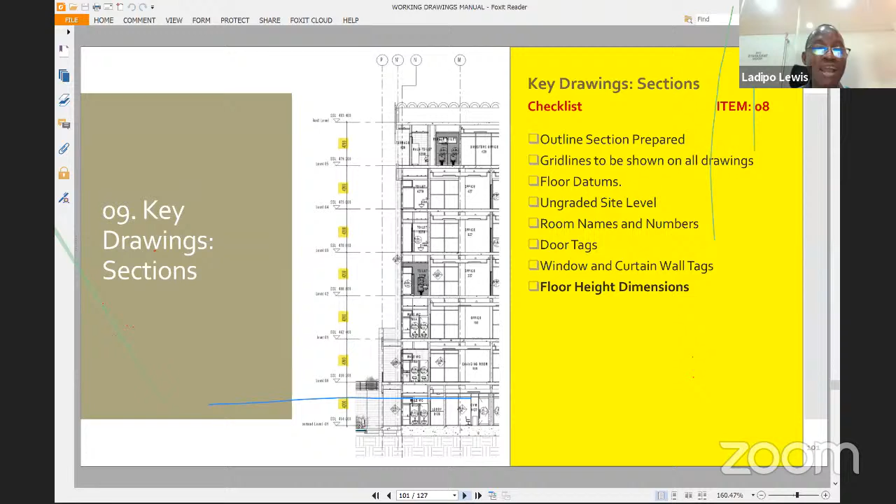Then your floor height dimensions. This is key that you have them. Floor levels will change. As we indicated before, you had your floor datums, but you could have various floor levels that change from one space to another. So you might want to indicate that, if it's a simple building where you just have general datums like that, but in a complex building, you could have multiples of floor levels from one space to another.

Then your dimensions. It's key to have dimensions in sections. So you can relate floor to ceiling heights, assumed floor to ceiling heights. You might need to dimension certain things, not based on the bare concrete floor, but on dimensions that will be placed after the finishing has been done. So that helps in dimensioning your sections appropriately to know where certain fixtures will be.

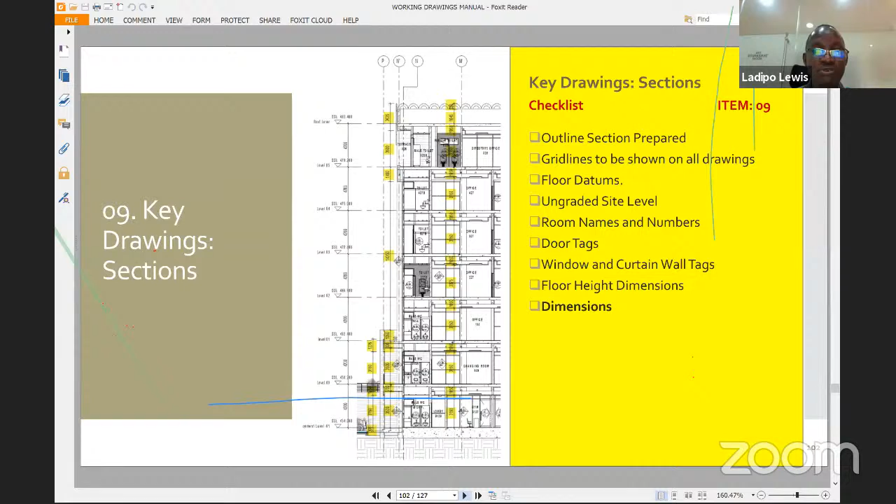Then you also have callouts that will go out to your assembly drawings. You might need to call out various parts of your sections to show details and to show particular elements that are critical to putting up the building.

Then you review again and go through all your checklist items. It's important that you review before you pass on drawings to contractors or to other consultants. Reviewing helps to avoid a lot of mistakes.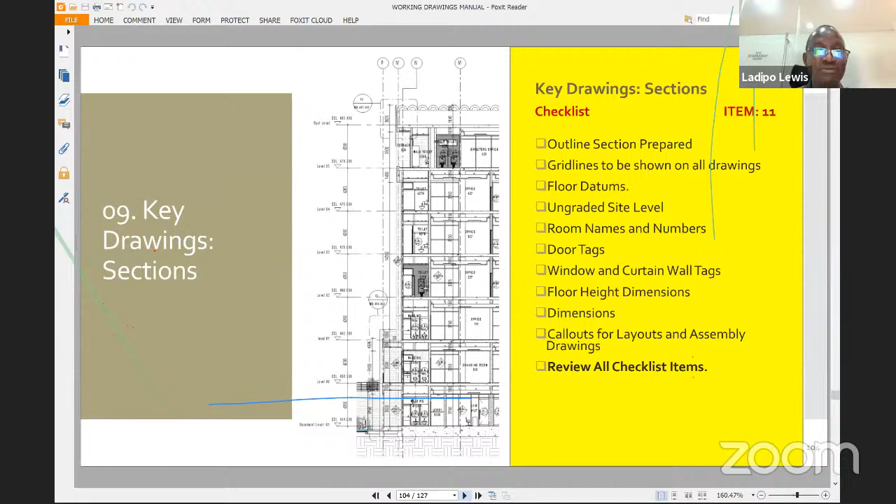So we go to the key drawing elevations. Of course, you start with the outline of the elevation, which is practically what we sometimes see in a lot of drawings. People just put the outline on elevation and leave it there. No. A good working drawing will have the grid lines show up on the elevations.

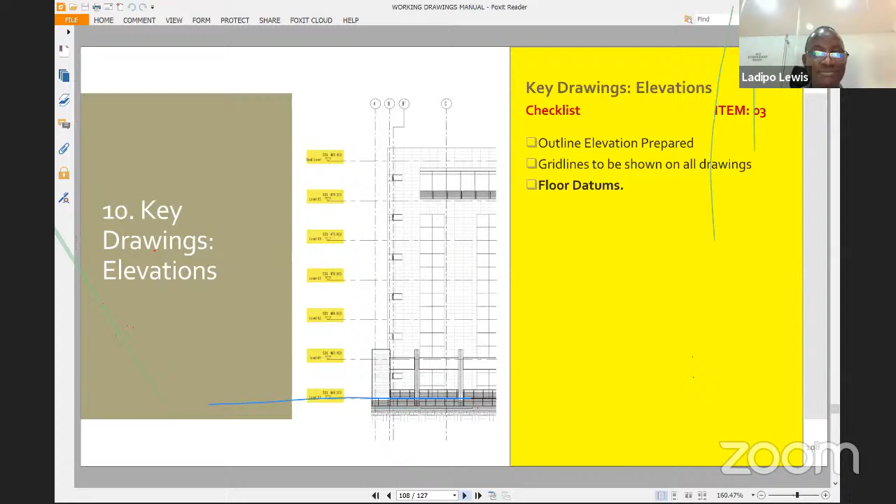We'll have the floor datums show up on the elevations. Then we'll have the ungraded site level show up on the elevations as well. So you can see how that would affect your elevation and your facade.

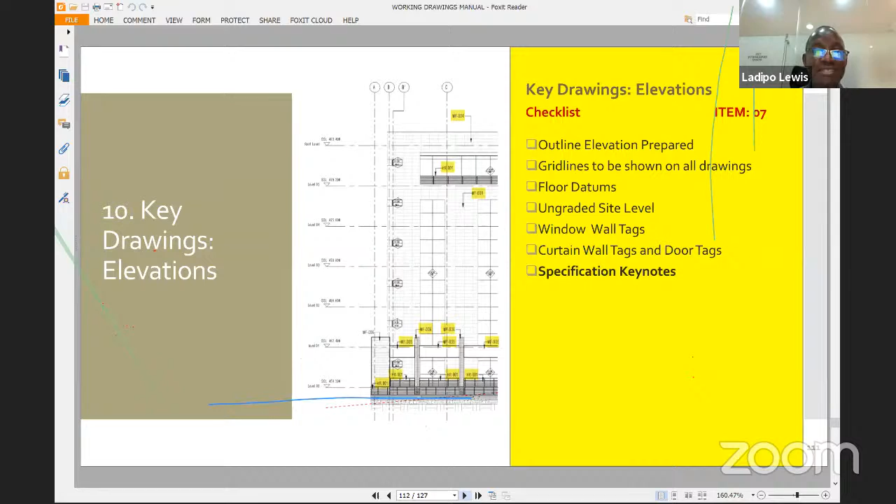Then you also have the window wall tags. These will appear on your elevation so we can see how those windows fit in with your elevations. You also have, if you have curtain walling and door tags, this also can be put on your elevations. And specification keynotes. It's key because a lot of times things on elevations are just drawn and are not

described. So here you have your specification keynotes showing those various elements. Handrails, what are they going to be made of? The glass, is it aluminum? Is it stainless steel? Is it plastic? Whatever it's made of. Then your cladding too. You will put specification notes to them and describe them from your facade.

If you have different thicknesses of plaster finishes, it is key that those things be shown on your elevations and not left to the contractor to try and decode. Then you have callouts. Elevations also have callouts. You might want to show specific details at a larger scale, scaled up so that you can see them clearly.

It's important that is done. So if you had your elevations at scale 1 to 100, you might bring them to a larger scale of 1 is to 10, 1 is to 5, 1 is to 25 to show those elements, and you might need to call them out so you can specifically look at it in detail. A lot of things are hidden on the scale 1 to 100, and whatever those larger scales on which you're doing your elevations.

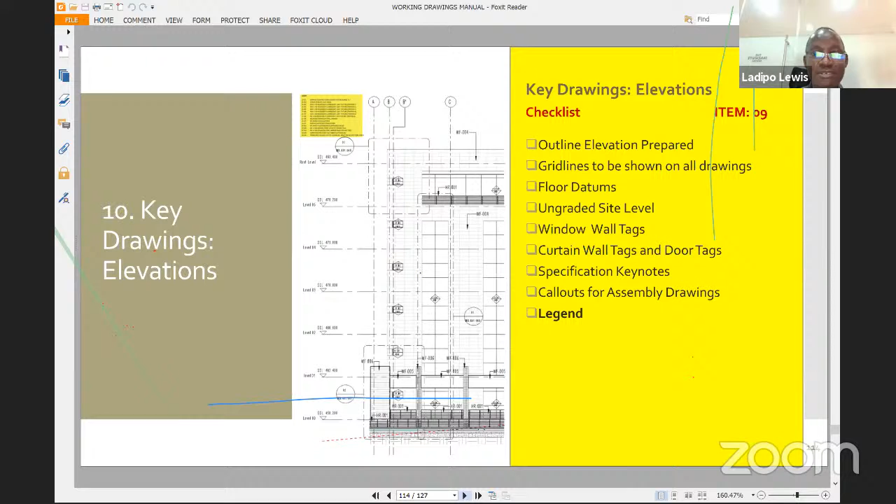So it's not something you're going to come up at a later stage and it causes confusion on site. So finally, we'll review all checklist items again at the elevation stage. So we'd like to stop here.

Okay, we have been asked to continue. So we're going to go into key drawings, interior elevations. And this is another part of the working drawings that isn't really looked at critically, but they are quite important. You see these elements show up in buildings where you now see things fitted in some odd places.

Wall elevations are important in any type of building because there are elements that are going to be fixed on walls. So you start with the outline of the elevation, then you go on to the grid lines. They are showing up again on your interior elevation, so we can identify where that wall is in the wall elevation, in the interior elevation, and how it relates to your section and how it relates to the interior of your floor plans.

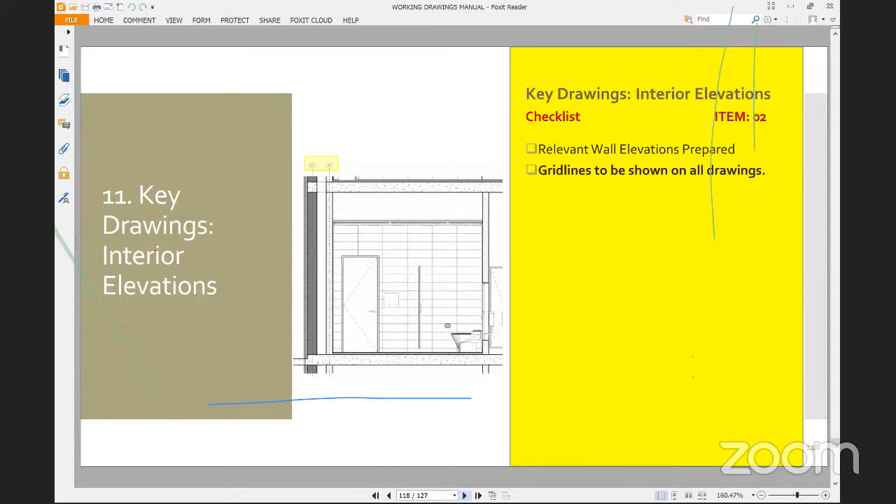Then you have floor datums. You need to know the floor levels. You could have floor datums for your concrete floors, or floor levels for differences in levels from one place to the other. All that will be indicated on your interior elevations from one place to the other.

You have also room names and numbers, which will come out in your interior elevations. You have your window tags, door tags, curtain wall tags as they show up in your interior elevations. As you know, these interior elevations we are taking from your callouts.

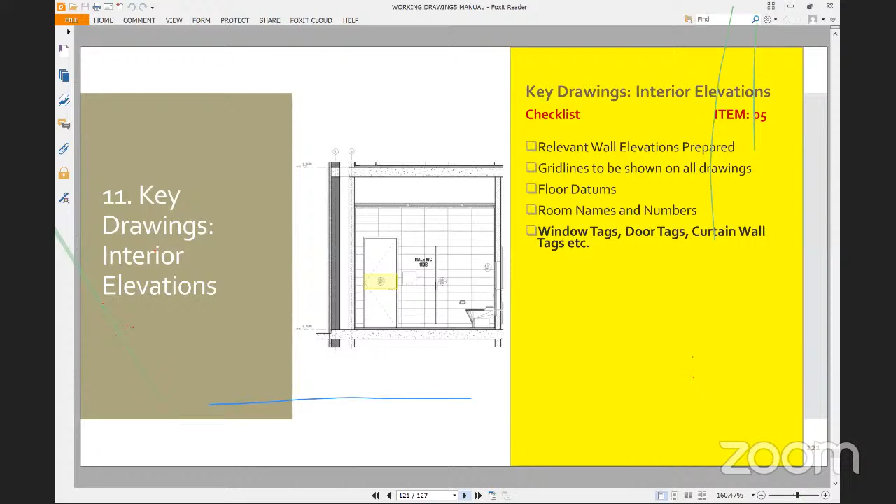So we'll move on to the set out dimensions for all fittings and fixtures. It's key so that this shows where your ceiling, like your suspended ceiling, how far below your concrete slab is it. Your tiling - from what point to what point will your tiling be made? So this will show dimensions for that.

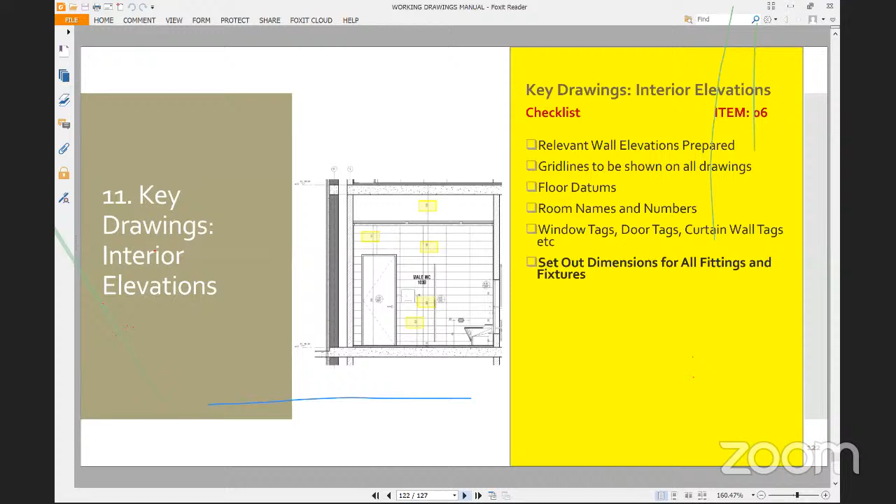Also things like toilet roll holders, hand dryers - you need to show dimensions as to what height. Even sockets and switches, in particular, you need to show what height and what dimensions they are above the floor. So those fixtures will be dimensioned critically on your interior elevations.

Then you also have your set out dimensions for finishes, especially when you have tiling patterns on walls. Here you dimension from what area to what area is this type of tile, and for that type of tile, and it allows you to see how your building will look like on your drawings.

Then you have your specification keynotes. They are very small elements like lighting fixtures, handles, handrails, handlebars that you put specification keynotes to, and would allow you to carry that to your legends. You also have callouts for those specific areas.

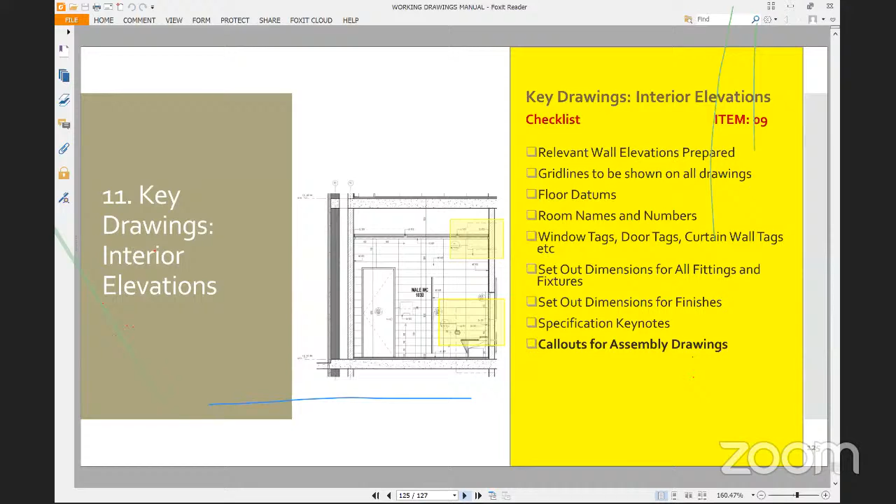For disability use, a lot of callouts are required to show specifically where those elements are. For special ceilings that you want to have some special patterns in, you need to call out that also from your interior elevations. Then the legend, which takes up what you've taken from your specification keynotes, and you put them in your legend to describe in detail what those things are. It makes the drawings quite neater and tidier.

And then you review again all your checklist items, and it helps to identify errors and correct them.

So this is where we stopped for today. We reviewed practically everything we did last time, and also went through the new items. As you can see, this is just an elementary checklist, very elementary. Each of the items noted has thousands of subsets that could come out of it. I've seen a checklist manual close to 600 to 1,000 pages of various items to review when doing working drawings, and depending on the kind of project, it could be as detailed as you want.

I've seen site plan drawings that had 30 sheets of details in them. It depends on the amount of detailed information you want to hand over to your contractor. The more information you put into your drawings, the more you save on errors. You save a lot of money on site, you save a lot of wastage, and you're able to understand how to get your building done on time because you've reviewed all those things. So I'd like to thank you for listening, and we'll be waiting for your questions and ready to answer them. Thank you very much.